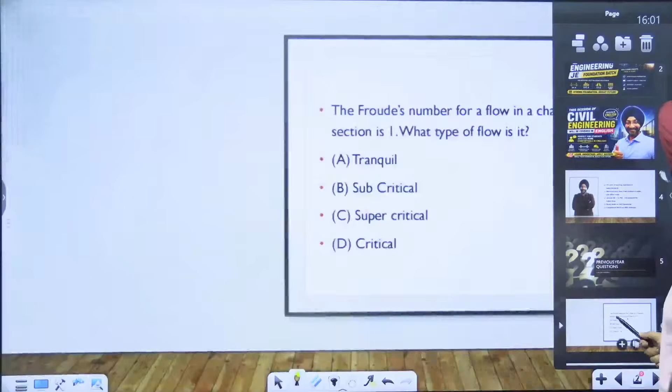So my dear students, let's solve some questions first. Let's move to the questions. The Froude number for a flow in a channel section is 1. What type of flow is it?

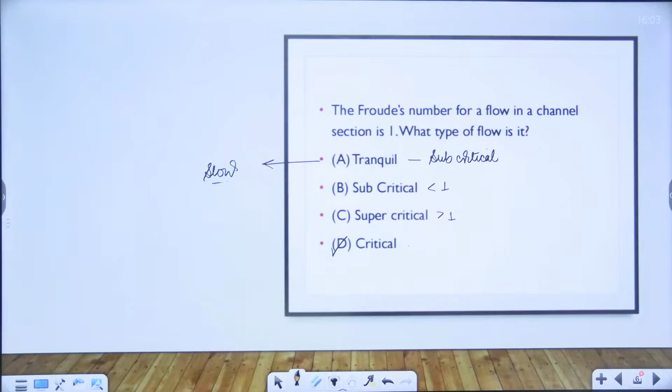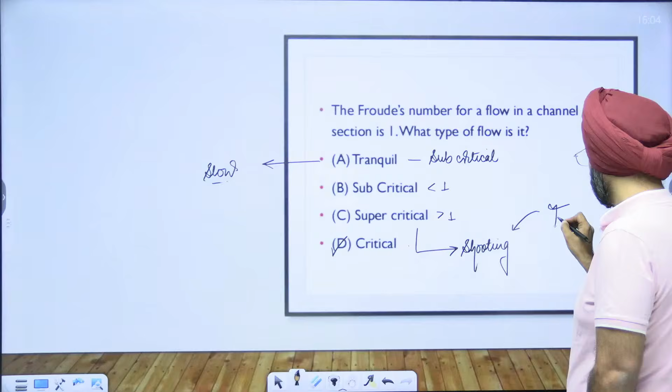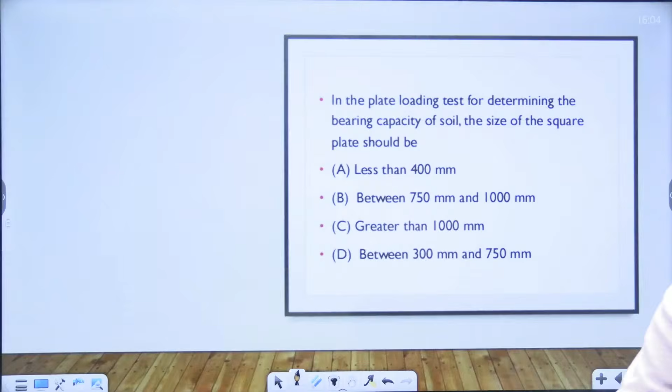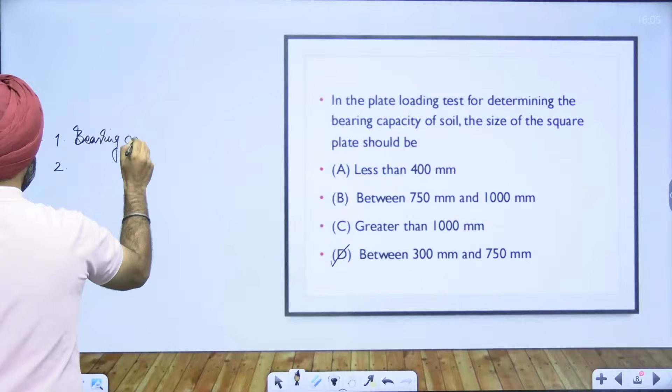So the size of the plate should be between 300 to 750 mm. Two parameters are determined using this plate loading test. One of them is bearing capacity. Can you name the other one? Through plate load test, you determine bearing capacity and settlement.

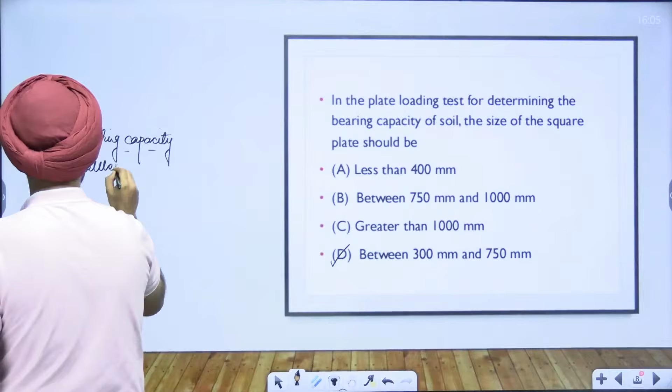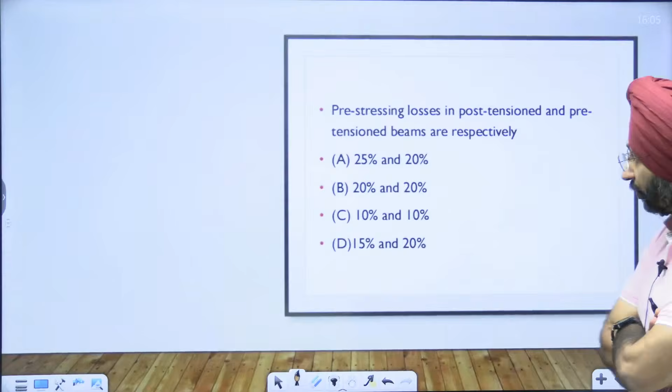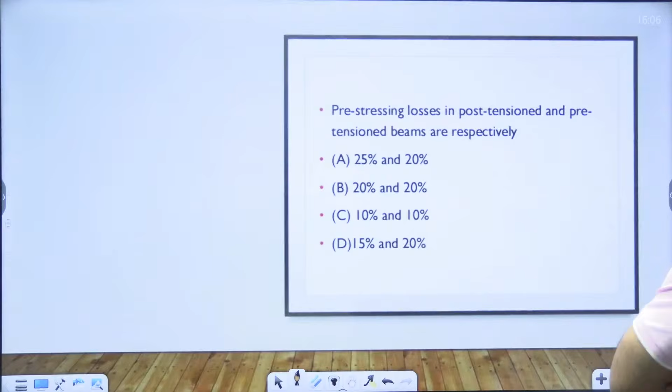Prestress losses in post-tensioned and pre-tensioned are how much? What is the magnitude of losses of prestress in post and pre-tensioned? You couldn't be more wrong. I have never seen a more wrong answer than this. So according to you, post-tensioned has more losses than pre-tensioned.

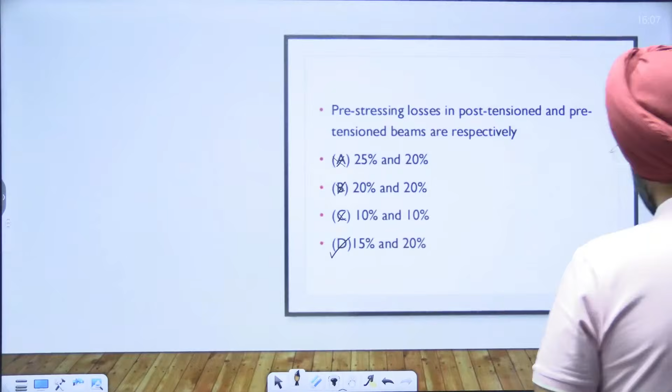100% A cannot be the answer. They both do not undergo the same type of losses and the same magnitude of losses. The answer is option D. You have perplexed me. So, how could you say this answer? Even I was about to ask another question, that why the losses in pre-tensioned are more than in post-tensioned. Because of which factor are the losses in pre-tensioned more than post-tensioned?

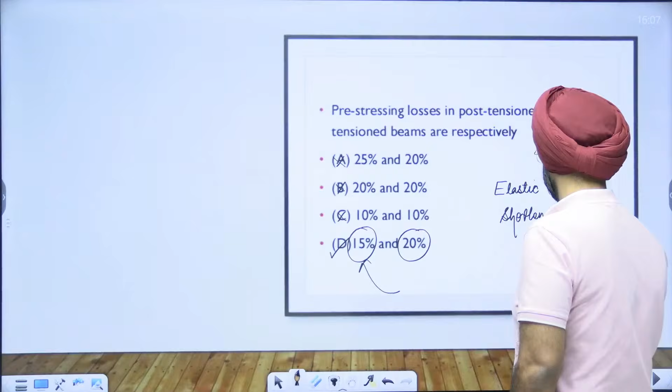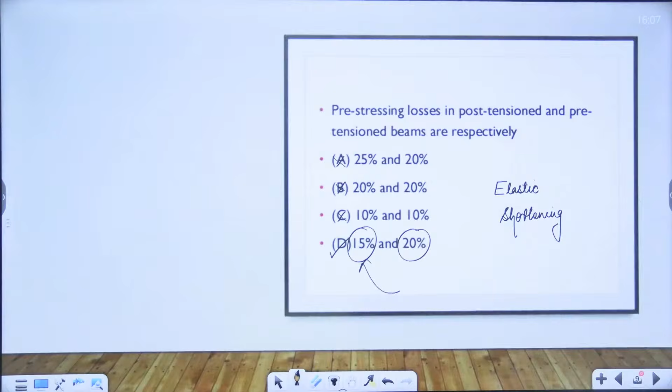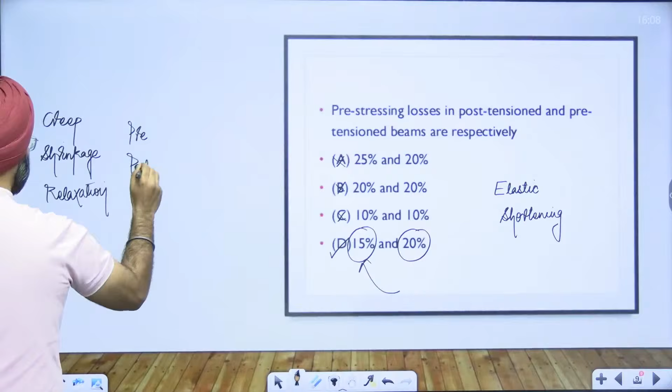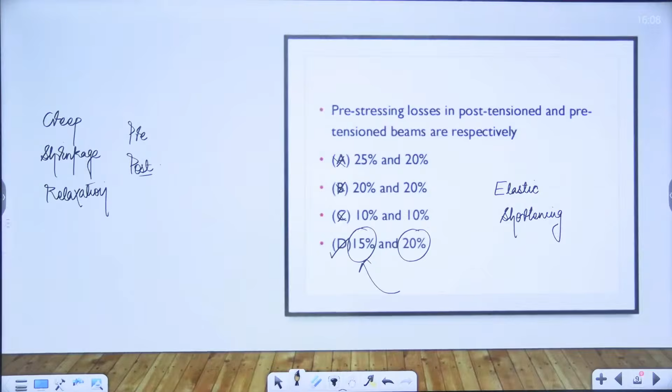The magnitude of elastic shortening is very high, resulting in more losses in pre-tensioned compared to post-tensioned. No my dear student, relaxation occurs in both types of PSCs. Creep, shrinkage, and relaxation occur in pre as well as post. They occur in both types. Friction and anchorage slip occur in post-tensioned only, and elastic shortening occurs in pre-tensioned only.

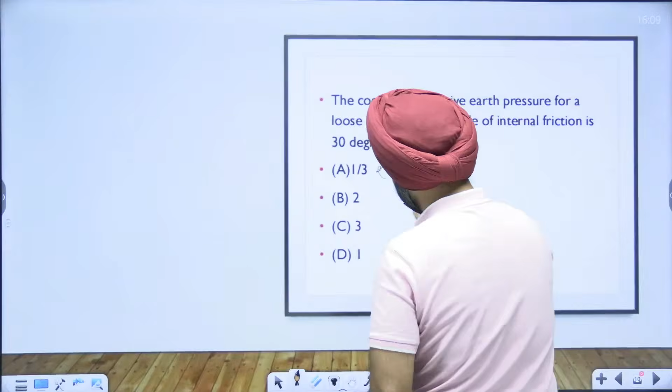The coefficient of active earth pressure for a loose sand having an angle of internal friction 30 degrees is what? Now, extremely easy. Good evening. So, if phi is 30 degrees, then Ka is 1 by 3, Kp is 3, and the value of K naught will be 1 by 2. Ka is less than K naught is less than Kp.

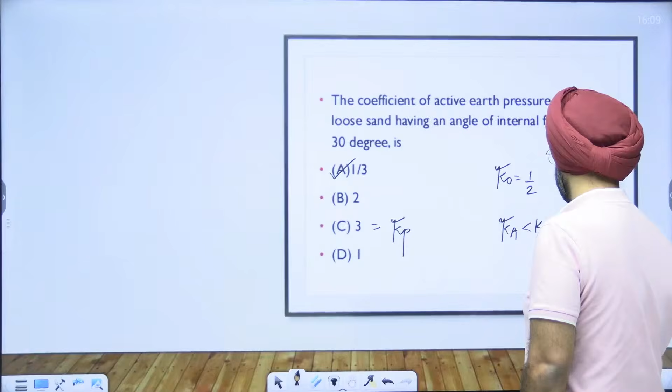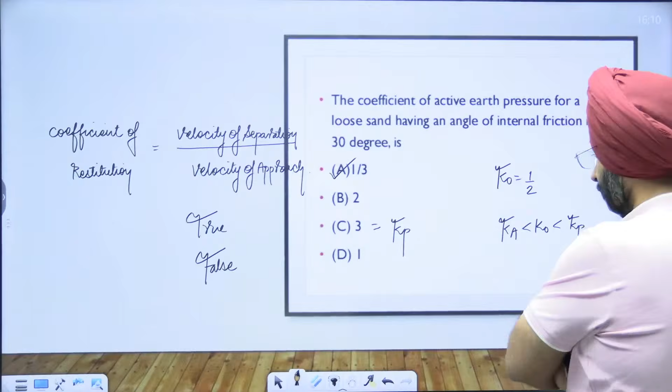Plenty of questions are asked on coefficient of restitution.

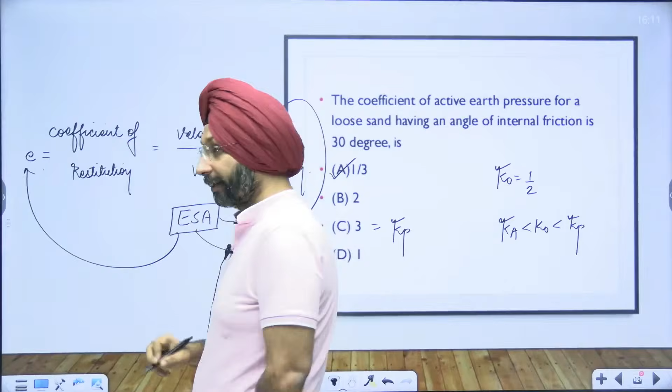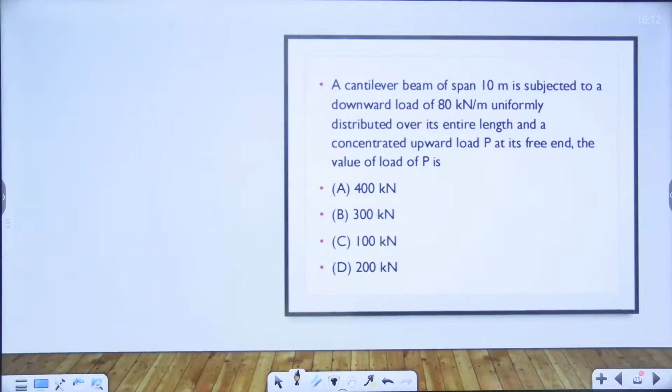When a cantilever is subjected to UDL and a point load is applied, we know that this value comes out to be 3WL by 8. So W is 80, L is 10, so 3 into 80 into 10 by 8 equals 300. The answer is 300.

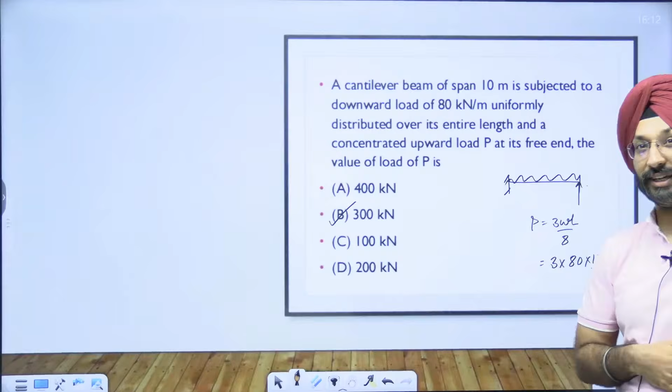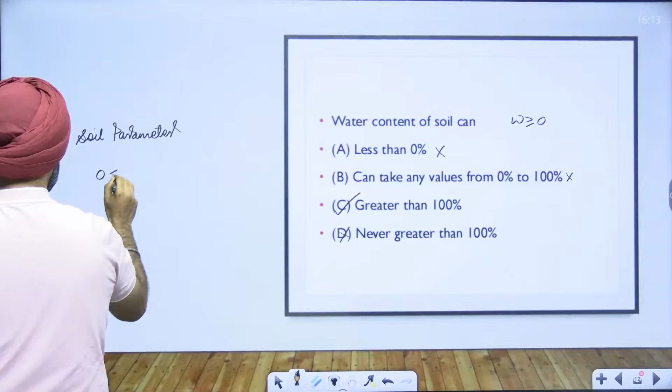Which soil parameter shows the range 0 but not equal to 100%? Which parameter shows this range? Let's see how many of you are able to solve this one. Which soil parameter has the value equal to or greater than 0 but cannot be equal to or greater than 100?

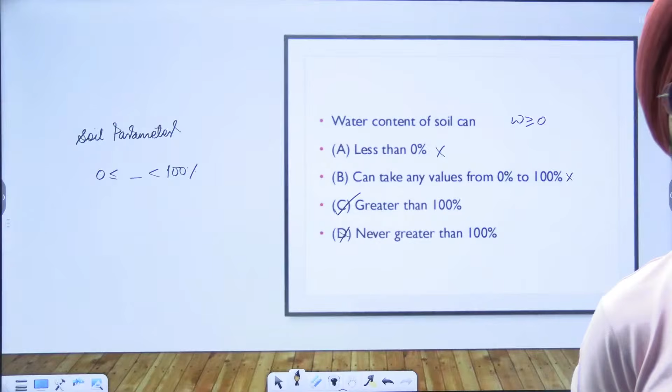Now Abhijit is the only student focusing on the question. How can it be porosity? Porosity is volume of void by total volume. We know that volume of void can never be equal to 0, so porosity can never be equal to 0. Here I have mentioned that the parameter can become 0, so how could it be porosity? In no case can it be porosity.

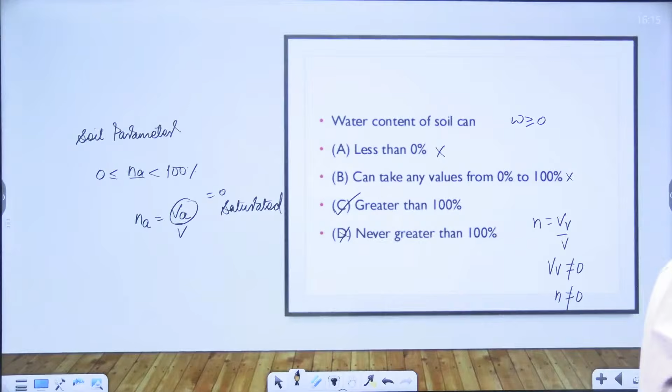The answer is percent air voids, Na, because Na is Va upon V. Now Va can be 0 for saturated soil, but Va cannot be either equal to or greater than capital V. So the answer is percent air voids.

Number of wind zones in India, not earthquake zones. How many wind zones do we have? Very good, we have 6 wind zones.

Let's say if you do not know the answer, now you know it, so mark this question. The questions you are unable to solve the first time, make sure you archive them, putting them into a different section so that before any examination you can solve such questions again. The ones you already solve easily need not be repeated.

Which of the following is the load factor? Good question. The load factor is collapse load upon working load. Not option C.

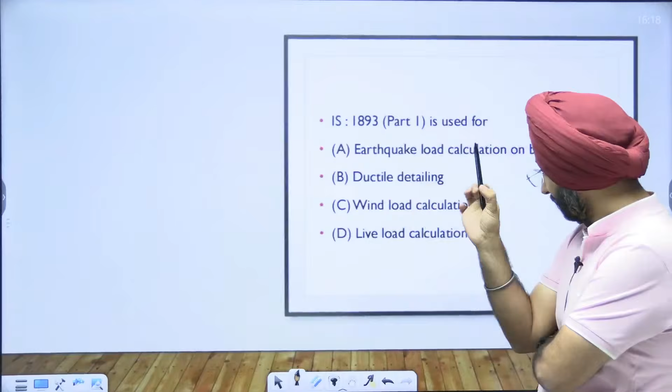IS 1893 - we solved the same question in the morning as well. IS 1893 is related to earthquake. Ductile detailing is IS 13920.

Wind load, live load is IS 875. Seismic zones in India - now there are 5 seismic zones.

Compressibility of sandy soil is what - much less than that of clay soil, almost equal, or much greater than clay soil? Compressibility of sandy soil is less than that of clayey soil.

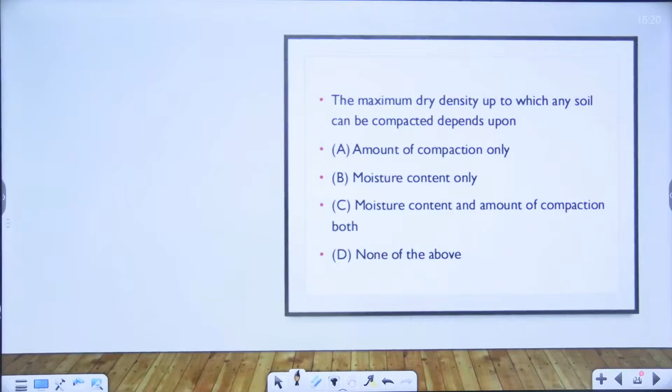The maximum dry density up to which any soil can be compacted depends on what? It depends on moisture content and amount of compaction.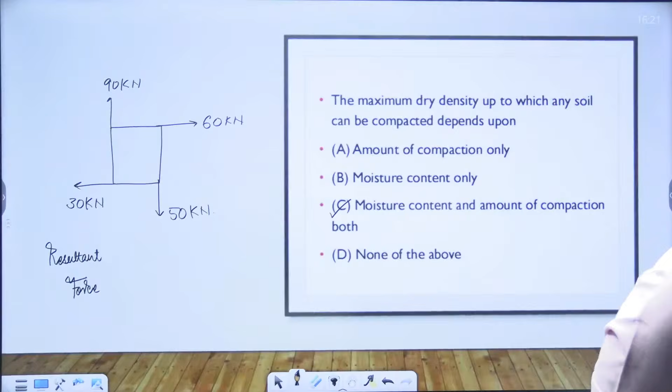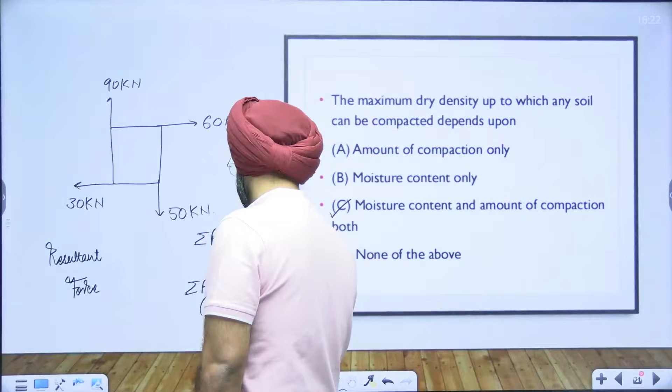These types of questions are regularly asked. First, determine the net force in x direction: 60 in this, 30 in this, so net force is 60 minus 30, which is 30. Then net force in y direction: 90 minus 50 equals 40. So the resultant will be under root of 30 square plus 40 square, which is 50.

Effective stress on soil does what?

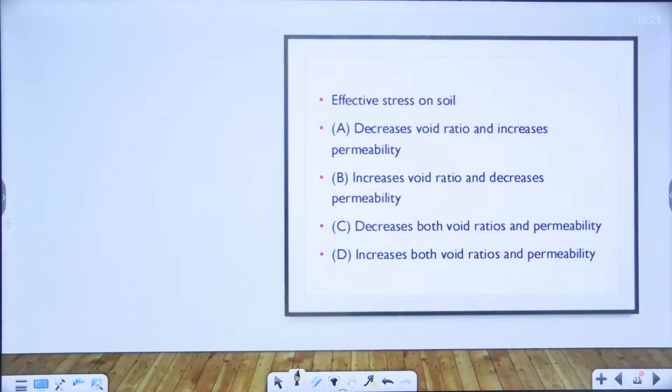So, an increase in effective stress leads to a decrease in both void ratio and permeability.

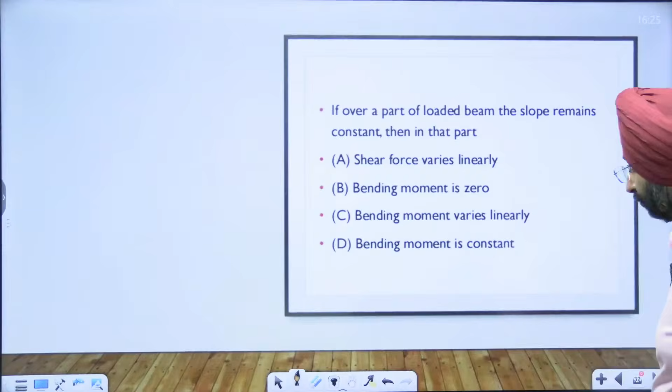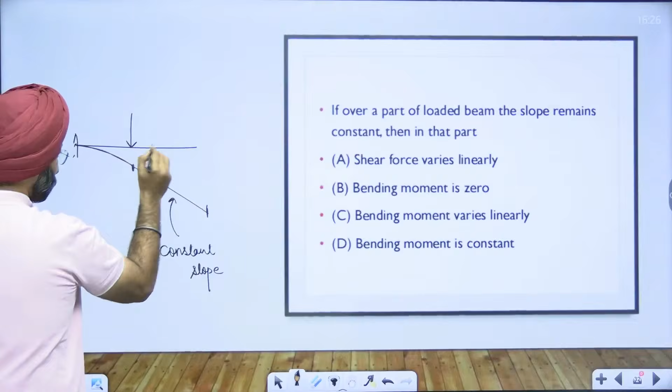Slope remains the same. Now when does the slope remain the same? You have taken a cantilever, applied the load somewhere in between, there comes the bend, and after that a straight line. So from here to here, constant slope. So now the slope is constant. If I ask you what is the bending moment from this point to this point, it is 0.

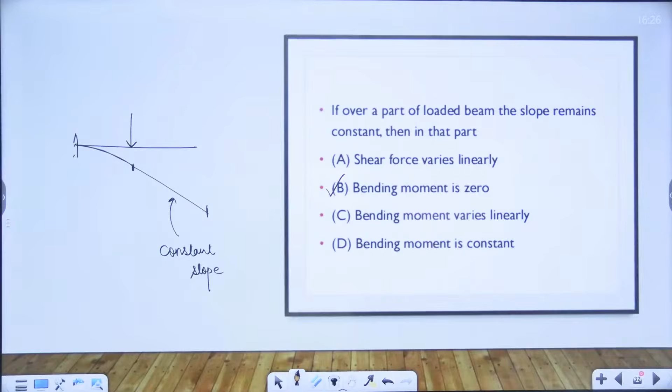IS 875 part 3 is used for what?

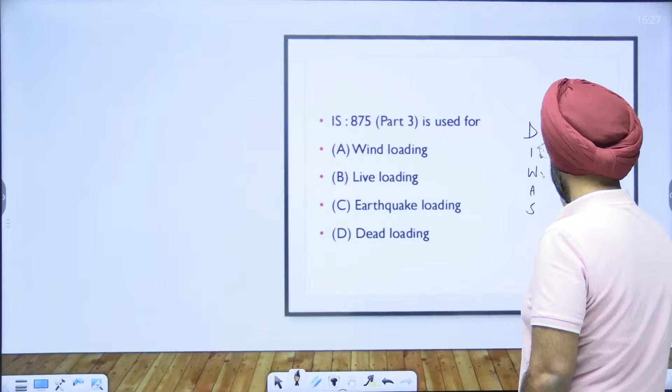So students, we have made a code for this, which is DIWAS: Dead, Imposed, Wind, Snow. This is wind loading.

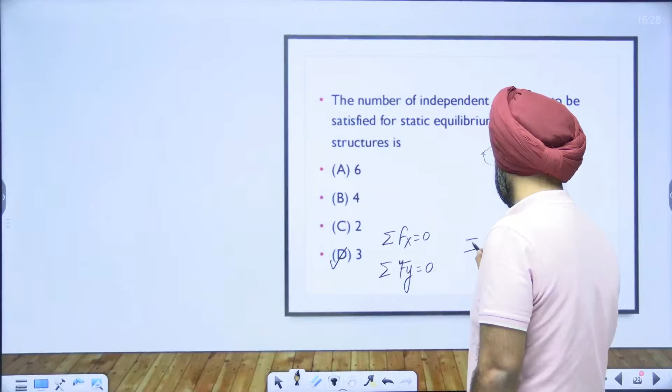The number of independent equations to be satisfied for static equilibrium of a plane structure is what? For the plane structure, it is 3: Sigma Fx = 0, Sigma Fy = 0, Sigma Mz = 0.

If the permissible stress in tension is 145 MPa, then the depth of neutral axis for a singly reinforced section is what?

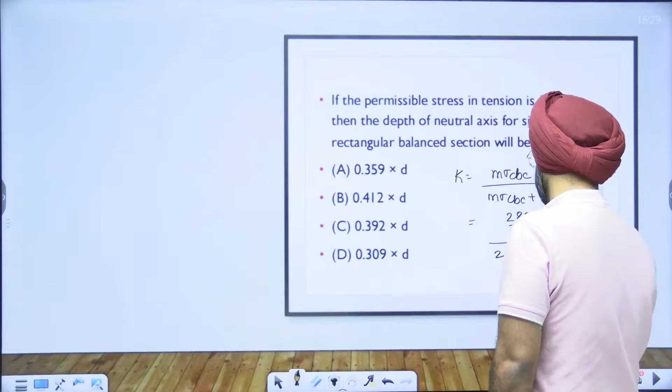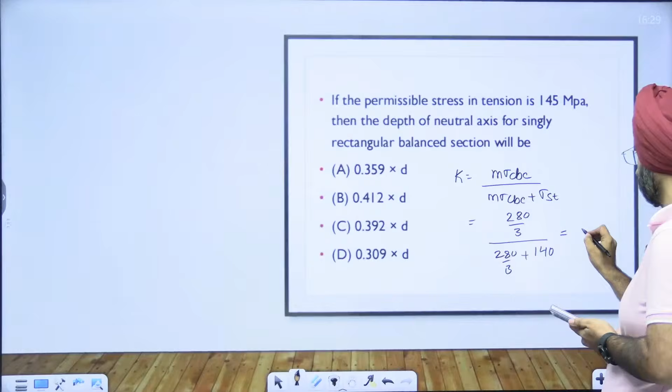So K equals m times sigma CBC, divided by m times sigma CBC plus sigma ST. M is 280 by 3 sigma CBC. So 280 by 3, 280 by 3 plus 140. So 280 by 3 divided by... the option.

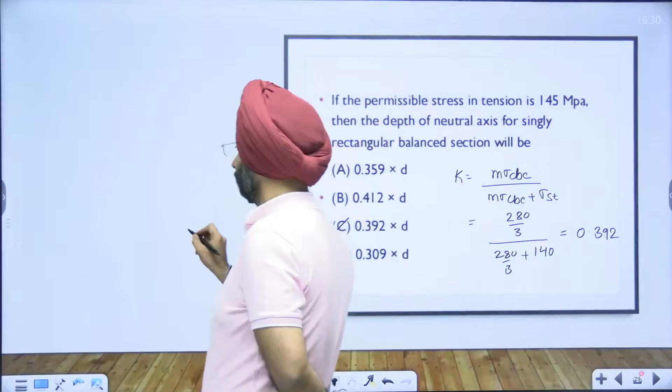The point of contraflexure is a point where what happens? What happens at the point of contraflexure?

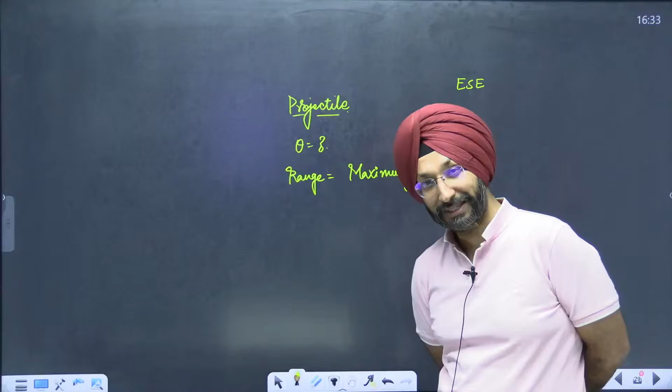Are you understanding the question? I have asked you at which angle the range is equal to the maximum height attained by the projectile.

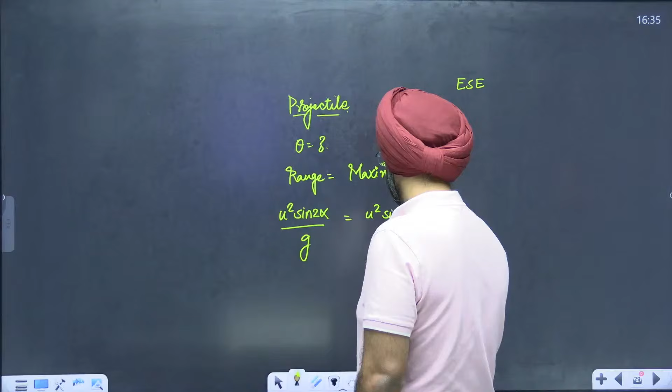All you need to do is put the expression of range and maximum height equal. Range is u square sine 2 alpha by g. Maximum height is u square sine square alpha by 2g. So this is cancelled out. Sine 2 alpha is 2 sine alpha cos alpha. This is cancelled out, 2 is multiplied, this is 4, and this is tan alpha. So alpha will be around 76 degrees.

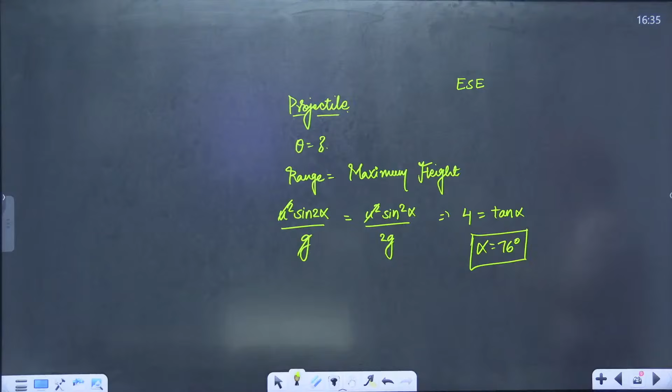Please look at the question first, don't rush. Let's say one of the options was 45 degrees, you would have marked it.

The purpose of reinforcement in pre-stressed concrete is what? What is the purpose of reinforcement in pre-stressing?

And there's no calculator, still at least the answer should not be 45.

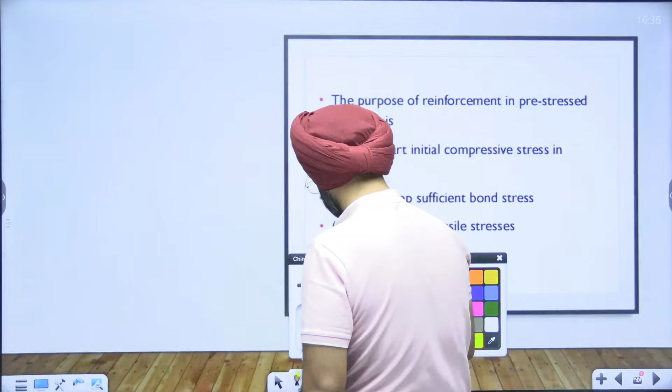This is to impart initial compressive stress in concrete. So children, the only purpose of reinforcement, the only purpose of steel in PSC, is to provide initial compression stress. Let's say if there is some other material which is able to do the same thing, you can replace that material with steel. Whereas in RCC, you cannot replace steel because in RCC, steel is being used to bear the load. So in RCC, steel is non-replaceable, you cannot replace it. But in pre-stressing, you can replace it with any material which is as efficient in providing the initial compressive stress as steel.

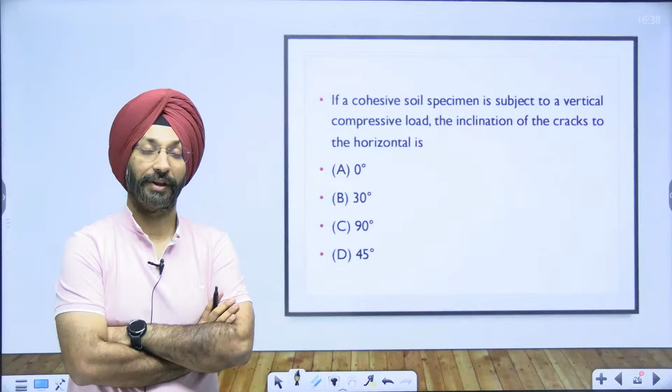The answer is 45 degrees. This is cohesive soil, so phi should be 0 degrees. Now the failure plane is 45 degrees plus phi by 2. Phi is 0, so this has to be 45 degrees.

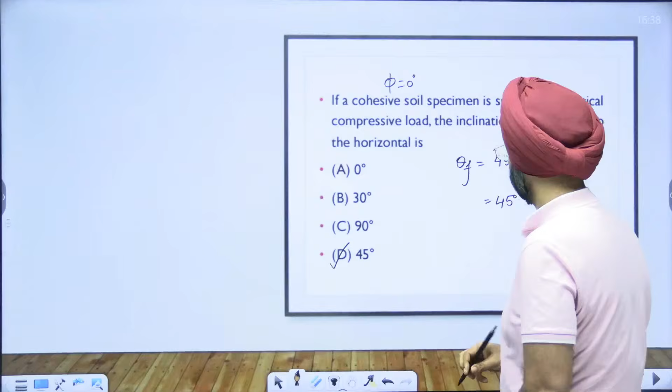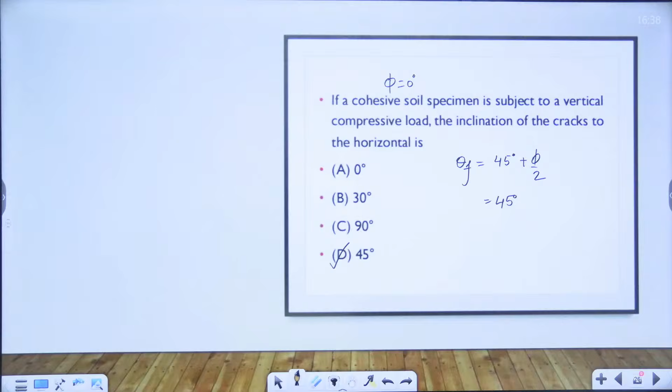You are like very much protected in the form of online class. In my offline classes, I used to instill a bit of fear in the students' minds. And the reason is, I want you to bear the psychological pressure. If you are 100% sure in your answer, then whatsoever I say, you will not go down from your answer, you will stick to it. But if you are not sure with your concept, I can easily shake your confidence. So the purpose is just to make you confident, and you become confident when you have the knowledge. So the purpose is simple and clear, that you should gain knowledge. You don't know, maybe if I ever have an offline class, you will be able to see.

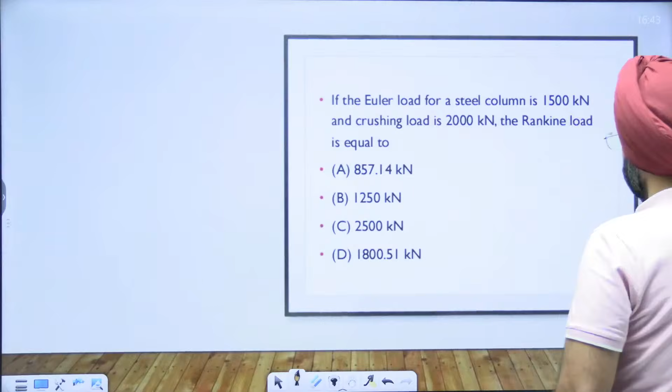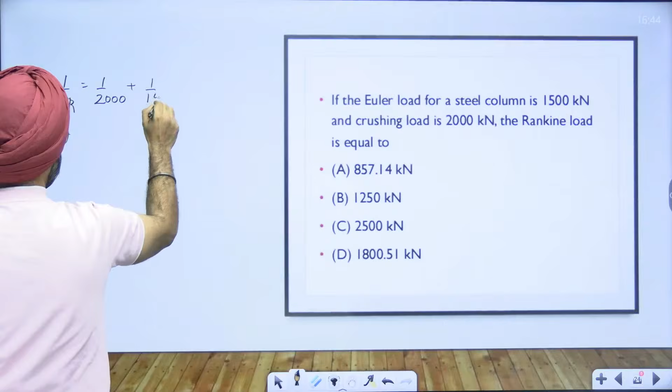So the Rankine load: 1 upon P is 1 upon PC plus 1 upon PE. Solve it now. 857.14.

At the location of plastic hinge, what happens? Very good question. What happens at plastic hinge? Curvature becomes infinite. Very simple question. How? How did you conclude that? Give me the explanation. Sometimes we just memorize the option.

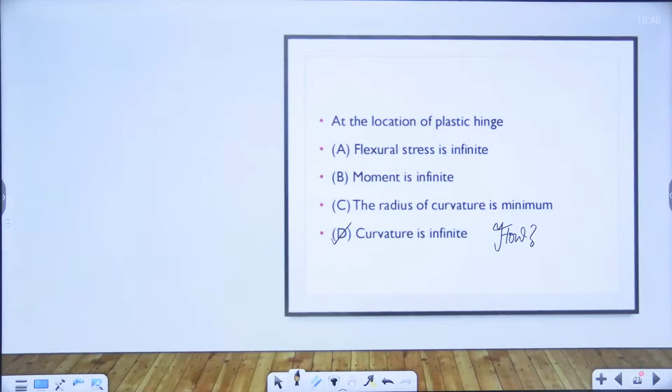I'll just memorize it. I just want to see whether you have only memorized it or you know the reason. Why the curvature is infinite? Don't be Chatur Ramalingam. I'll just memorize it.

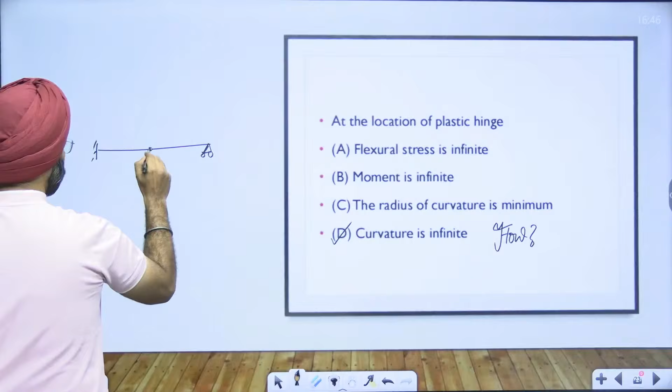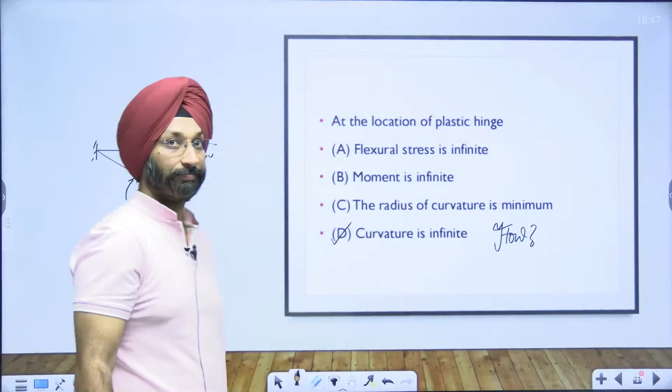And 1 by zero is what? Curvature. Radius is 0, not infinite. Curvature becomes infinite. The answer is curvature becomes infinite. Good.

Maximum percentage reinforcement in case of slabs is limited to what? You know the minimum, 0.12%, 0.15%, but what is the maximum limit of reinforcement? 0.12%, 0.15%, they are the minimum values. The maximum is 4%.